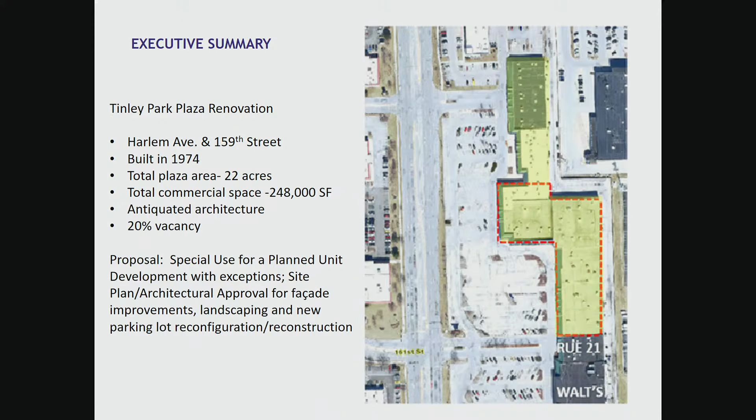As I mentioned, the plaza, let's move the slide to existing site and phasing. There are 3 phases to the project. The first we've already been involved in with phase 1, that was the outlot. That was approved back in 2015. Very nice development, and included revisions to that north parking lot north of the development.

Phase 2 is the one that we're contemplating now, and that comprises a little more than 100,000 square feet, and the demolition of 87,000 square feet, with reconstruction of 67,000 square feet that will include a new soft goods retailer and grocery store. If we could advance the slide. Oh, I'm sorry, never mind. Don't, not yet.

And for those of you that are pretty familiar with the plaza, it handles the very northern tip of the plaza on down to right where Rue 21 was, just north of Walt's. Phase 3 will be everything from that point south, and that is scheduled to begin subsequently to the occupancy of phase 1. So looking to begin construction in the fall of 2020 and occupancy in 2021.

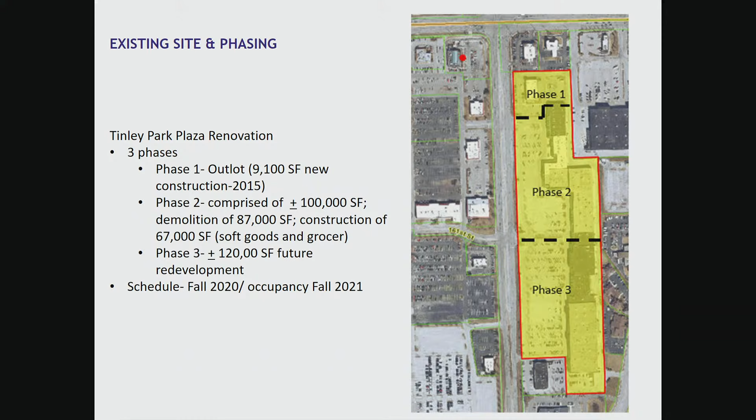Next slide please, on zoning. The property is currently zoned B2. What's a little interesting after we did some research is that the maps since 1977 have indicated this property as a planned unit development, although we could not find any evidence of that PUD ever being adopted. Unfortunately, we found a couple other shopping centers in the community that were erroneously designated as a PUD on the maps. And because there's more than one structure on these parcels, that pushes us into a PUD.

So one of the proposals, as part of the application, we're going to be looking at a designation of a special use for a PUD. But unlike a new construction where we're going to get into much more of the development and site planning, that's going to be restricted on this parcel because we're really looking just at a renovation of an existing site. As the map indicates, the property in the immediate area north and to the east is B2. Across Harlem Avenue to the west, we have the B3, Community or General Business and Commercial District. South of that is Park Place, that's also a B3. Directly south of this center is the B4, and there's a medical facility there.

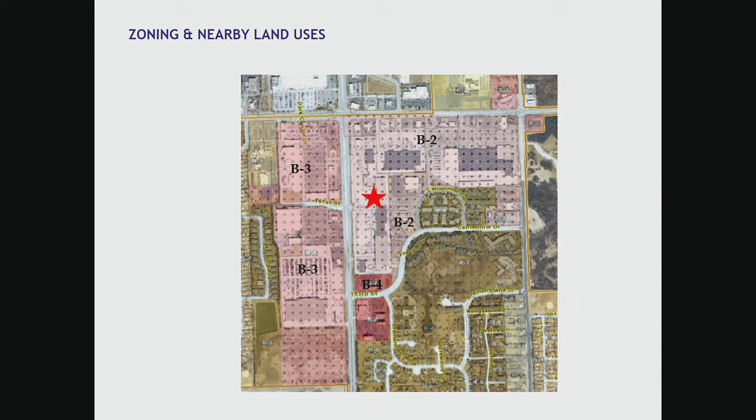Let's move on to the site plan. This exhibit helps to clarify the portion of the building that's going to be demolished. Hopefully that's up in front of you right now. It's not caught up on mine. And as the aerial shows, where you see the red arrow, everything from there up to Rue 21 is what's being demolished.

That area is where some of you remember the Women's Workout World and TJ Maxx were. So that area is being demolished, and the new construction, when you look at the plan below that, you'll see that the facade, or the west facade, is moved back. This provides for a larger parking field and much more straight line access to the center. Before, it was kind of circuitous going around that bump out to the south. So I think this makes for a much cleaner access way to the development.

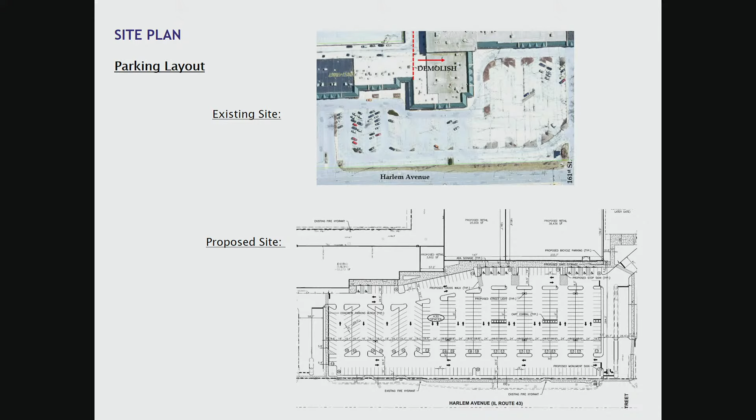Let's go to the next slide please. This is something that was just sent to me just prior to the meeting. It wasn't in your packet, but the developer put this together, and I think it's kind of interesting. You can see the existing aerial underneath, and then the yellow highlighted area is the new construction. Hopefully that makes it a little clearer. I think it was a little difficult at first to understand what area is being demolished and what the reconstruction is.

What really changes the most on this project in terms of site planning is the parking field between the two access ways off of Harlem Avenue. Right now, it's all diagonal one-way parking. What they have done is taken the four north aisles and kept those as diagonal, but the main parking field.

In front of the soft goods stores and the grocer will be traditional perpendicular parking. What I also really like about the change in this design is it brought some parking right up to the building, perpendicular to the building, kind of the traditional downtown type of layout, or as mentioned in the report, some of the newer lifestyle centers like Bolingbrook Promenade, where you bring the parking right up to the front door of the retailer. This really provides for a little bit more intimate, pedestrian scale.

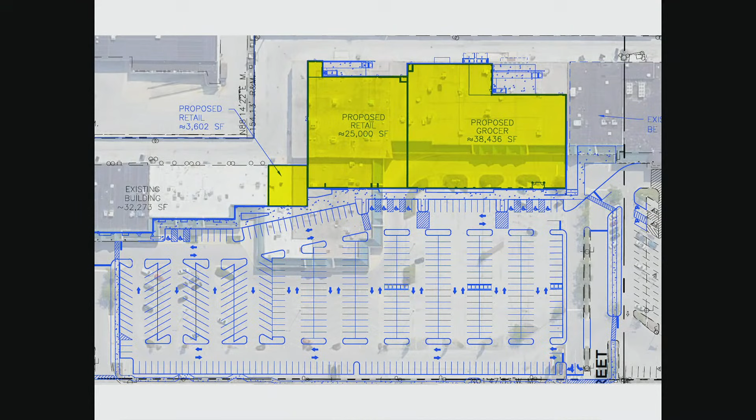One of the issues related to the site plan that we need to discuss this evening—let's go to the next slide, please. What I want to show you there is just where the crosswalks are. You'll see the arrows I just discussed with the perpendicular parking, and then the circled areas are the crosswalks for safe crossing of that main aisle across the front of the buildings.

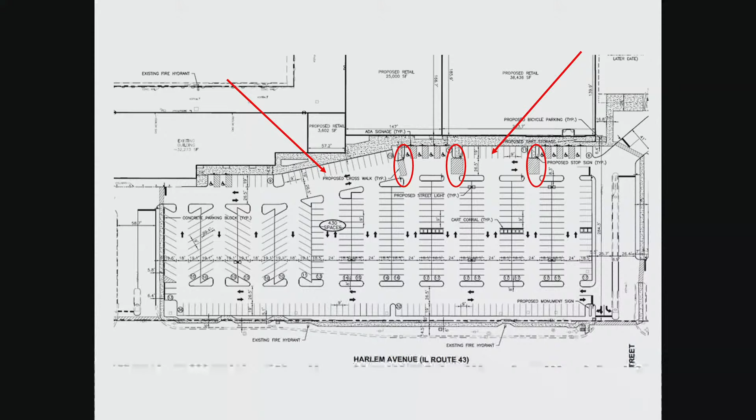Let's go to the next slide, please. What this slide is illustrating is that the main aisles actually exceed our minimum aisle width at 26.5 feet. Our aisle requirement is 26. The rest of the aisles are at 24, or in the case of the diagonal, they're at 18. This is our code, and I know we've discussed this several times on some other projects. I have to say that Tinley Park's aisle width is probably on the higher side than most communities.

It certainly makes for nice, convenient perpendicular parking. But as we see vehicles somewhat downsized and get a little bit smaller, I think we can certainly live with the 24-foot wide aisles. We have them just across the street at Sam's Club. We recently approved them at the Marriott hotels. And actually, the 2015 approval of the Brixmor outlot had some 24-foot wide aisles.

So this is the first item on the open item list where we need to recognize the exception to village code. And if that is supported, we'll include that in the special use, the PUD special use.

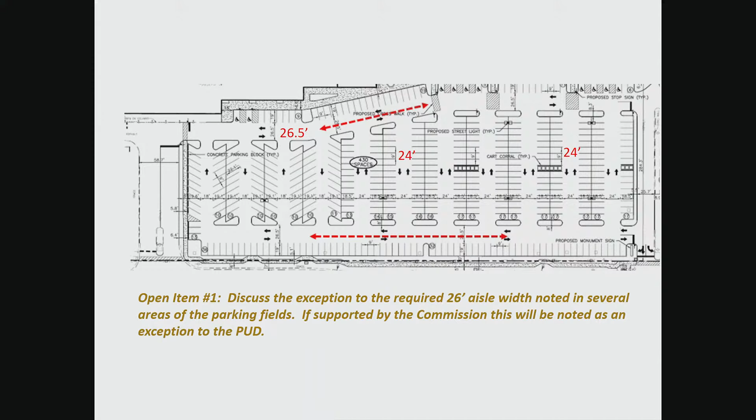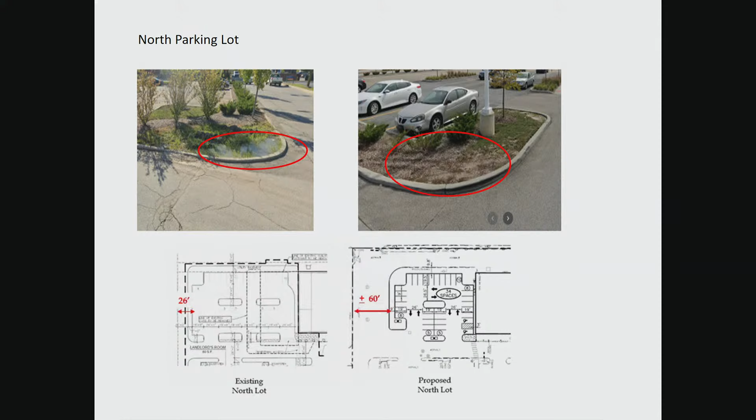But the next slide, please. I've been working with their engineers, and you can see from the red circle that was my biggest concern, where the landscape island on the north side is pushed back to accommodate the wheel drag, but it makes for a very awkward ingress-egress to the parking lot.

So we've been working up to the last minute, and I can see the engineers on Brixmor's side having a smile on their face because some of this stuff has been happening very late at night and early in the morning between them and myself.

But the plan on the right-hand side is something that staff recommended, and I think they've taken it into consideration. I'm not sure this is going to be the final rendition. I spoke to one of the engineers this afternoon, and we talked about some other possibilities because we want to make some more space for some dumpsters. But at the very minimum, we want to make sure that while we're addressing the wheel drag and the need for the delivery vehicles, that we've not made for awkward points of conflict between the parking lot and the access way. So I'm confident by the time we get to a public hearing that we'll have this taken care of. But I do want to keep them as open items so we make sure that that gets done.

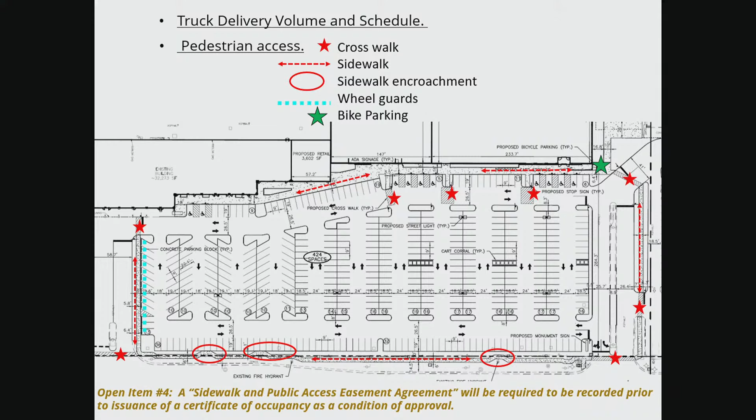So the only outstanding issue here, and they've already agreed to it, I think they actually sent it to me already, is to make sure we get a sidewalk and public access easement agreement. All right, next slide, please.

Trash enclosures, if you did your site review or site visit, you'll notice it's pretty unsightly back there. There is a haphazard array of individual trash dumpsters or toters, and they are not in the required masonry trash enclosure. So they have provided a trash enclosure for the new constructed areas.

And we're still working with them on how to accommodate trash enclosures back there on the existing inline stores. One of the problems is that there is a utility easement that runs right next to the building on the east side of that building. I had a conversation with the engineer just a couple hours ago. They're going to be able to fit 2 to 3 dumpsters in the northwest corner of that north lot we were just talking about, and a couple more at the south end. I'm going to leave it to them to continue to work on that and come back to us with a final proposal on how they're going to handle that.

So it is a requirement of our code and something we put in all our developments, we require it of all of our developments. So we'll leave that for them to remedy.

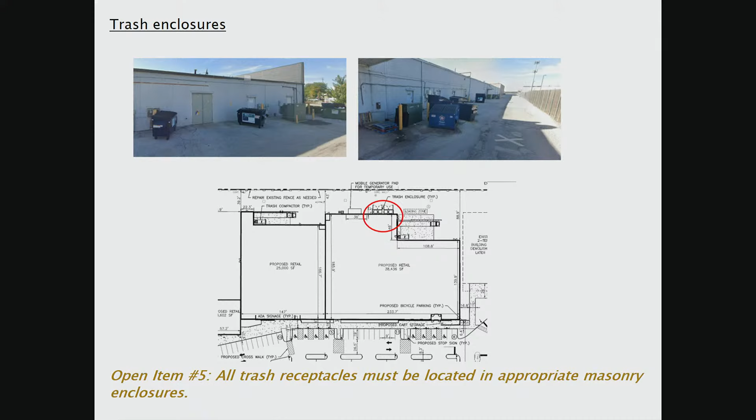Same with the mobile generator. There's a generator in the back. I have not seen anything yet on the screening of that, so I'm leaving that as an open item in terms of the screening of the mobile generator.

Let's see, you can go to the next slide. That just shows you where the mobile generator is going to be located.

And let's go to the next slide after that and talk about the mechanical systems. We've talked about this all the time with all of our developments. It's something we want to be careful to screen from public view.

Right now, for the views from Harlem Avenue, the RTUs are screened. They're not perfectly screened from the east to the west, but that is a pretty long view. If you were over at Centennial, I think that circle over by the bowling alley and Heartland Blood Bank, between those two, there are some views. But we want to do the best we can to screen those RTUs, especially when we're getting such beautiful architecture.

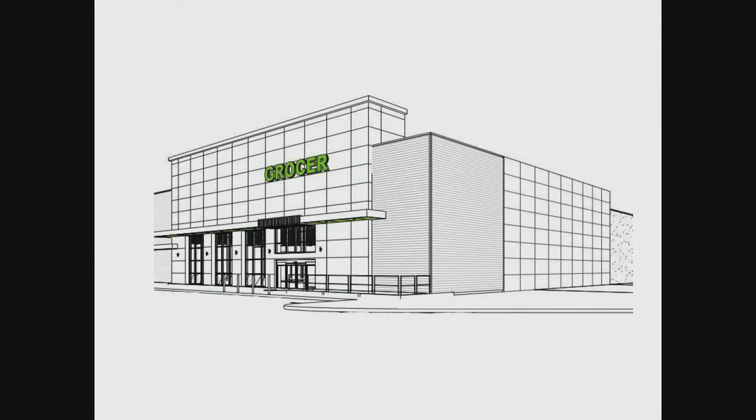Let's run through the next couple of slides, please. These slides are actually a companion piece to that plan with all the red arrows to show you where these perspectives were taken from. Let's get to the slide, Dan or Barb, where I know I've expressed to you the concern about the parapet on top of the grocer. And there's a red arrow on that. But this perspective is taken from southeast of the grocer and shooting northwest.

My concern there is, and we've run across this actually in the outlot development, that you have a parapet which looks great from the front, but it's not a true parapet. It just wraps around the corner. And so the bracing for that is actually visible. You can see in the left-hand side of that drawing, I should put an arrow there, you'll see there's a fairly small, but you can see that - I forget the term there. Mary, you mentioned it to me today. What do they call those, the bracing arms? Oh, I said they reminded me of angle iron.

So my concern is, and maybe not even just from this perspective, but if we were to, could we go back up to the site plan that was a companion to these drawings that show the various perspectives? What my concern is the building that will be constructed to the south will be set back from this grocer. And so anyone sort of entering, exiting that grocery store, if they were to look up to the right, they're going to see this unfinished parapet, and that's my concern.

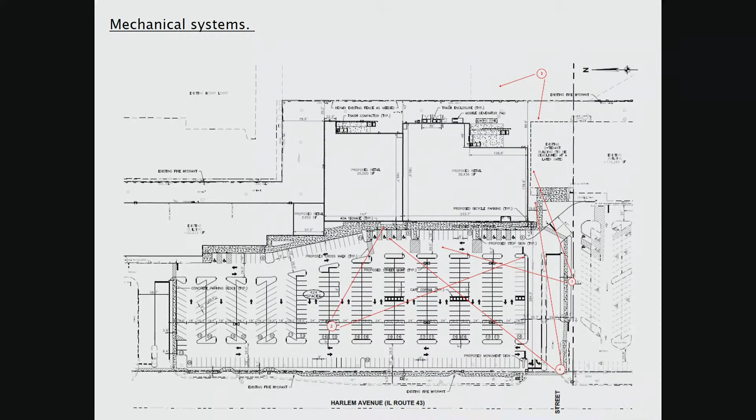Let's go down. Let's advance slides to the pictures, where we have a view looking east and a view looking west. That's after the various perspectives that they provided. And right now, we don't have that issue looking east.

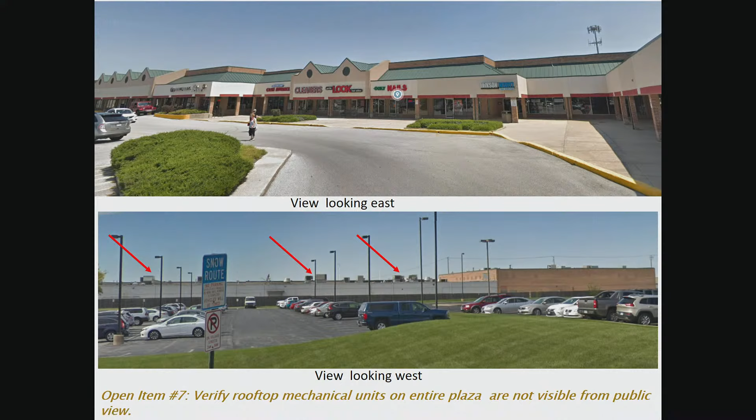And they did confirm that the new facades will meet or exceed this same height, so we don't need to worry about seeing any of the RTUs on the inline stores. During their presentation, I'd like them to confirm that that's true.

The concern, I think, is as we get further south on the junior boxes. You can see on that bottom photograph, that's the one looking west across from the bowling alley, right now they're very evident. So it's hard, I'm hard pressed to ask them to do much better than their current condition. But certainly from Harlem Avenue, I want to make sure they are screened from public view.

All right, so that open item, number 7, was just making sure that the RTUs are screened.

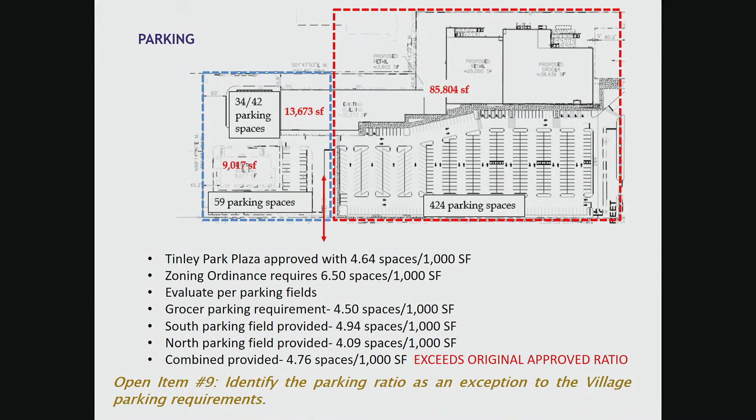So we're very pleased with... let's see, please mute your phone. Thank you. So let's go to the next slide.

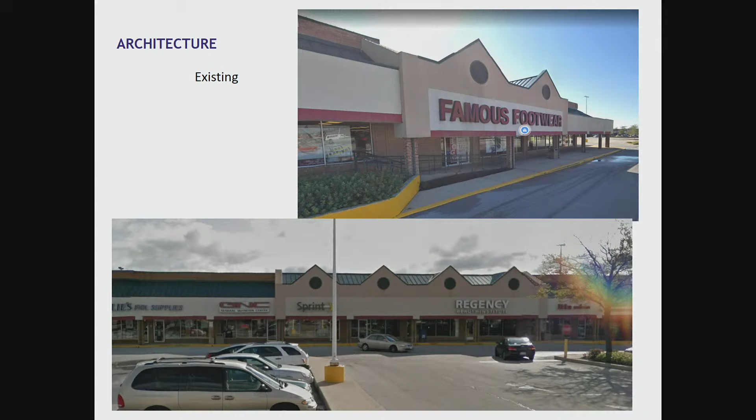The architecture at the top is what is there now, the outlot, and again we were very pleased with that architecture. Probably one of the biggest things we wanted to make sure of as we went to the renovation of the inline stores is that there was some consistency between the two. It doesn't have to be matchy-matchy, but we want it to look cohesive, and the developers want to make sure it's identified as one center, the Tinley Park Plaza.

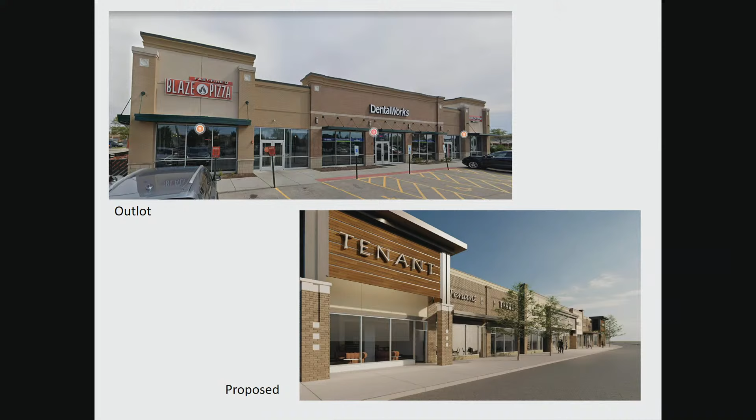So the new inline stores are beautiful, I think, very fresh, modern, natural and kind of earthy colors. And I do think that they are consistent with what we provided with the outlot in form and style, some of the fenestration, the building materials, and even the colors. Let's progress in those slides so everyone can see the nice renderings that Brixmor provided.

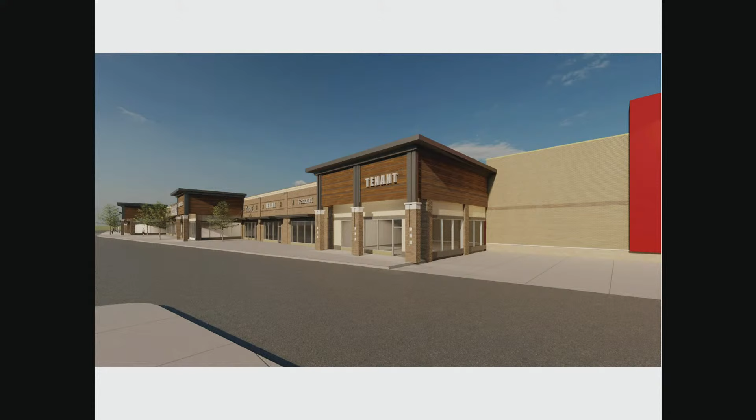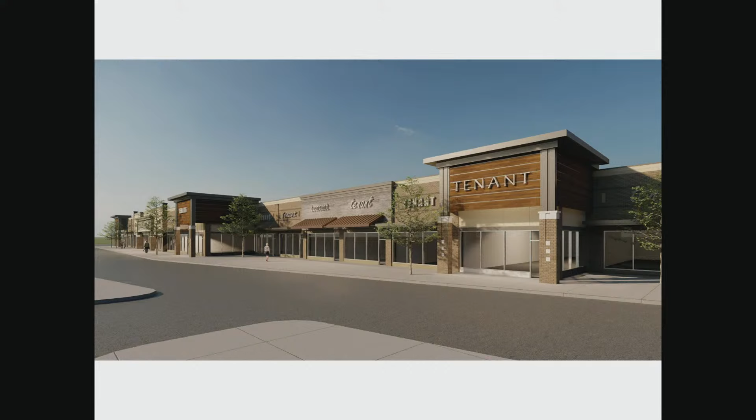So as we progress to those, again, I'm very impressed with the architecture that came out of this. I like the canopies that we had also in the outlot, and the use of materials, modern materials. They introduced me to... there are the panels... Stonewood phenolic. Phenolic, there it is. I hadn't heard of them before, the phenolic panels.

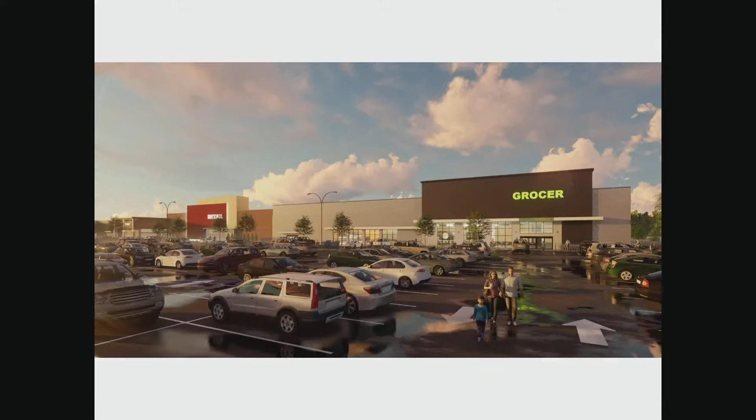Some of these are sort of like the Hardie board that we're used to, cementitious materials. They have Alucobond around the doors that has sort of a metal look to it. They have the wood look to some of those. You can see in the inline tenants some of it is horizontal and some vertical, so they've managed to create nice shadow lines, nice articulation across the front so it's not flat. Some nice details in the brickwork, soldier coursing, and some dentils. I'm very pleased with how this worked out.

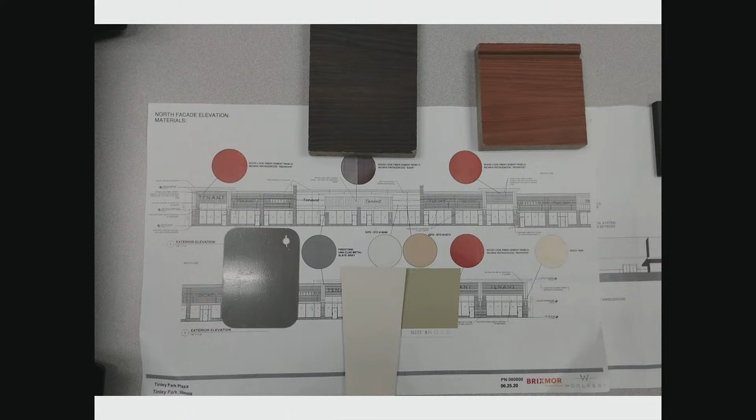Now, the materials in and of themselves are not prohibited. We do have a prohibited list, and they are not on it, but they are occupying more of the facade than what we normally have seen. Honestly, I think the result is beautiful. I don't have a concern about it. We're lucky this is a PUD, so we're not setting a precedent. If the board is supportive of the choices they've made in building materials, we can make that part of the PUD.

Let's move down on this slide. Unfortunately, you know how we usually bring in a building material board for you to touch and feel—we don't have that for you tonight. Dan was the wonderful photographer that put this together for me, but it gives you an idea of the colors and materials for the inline stores.

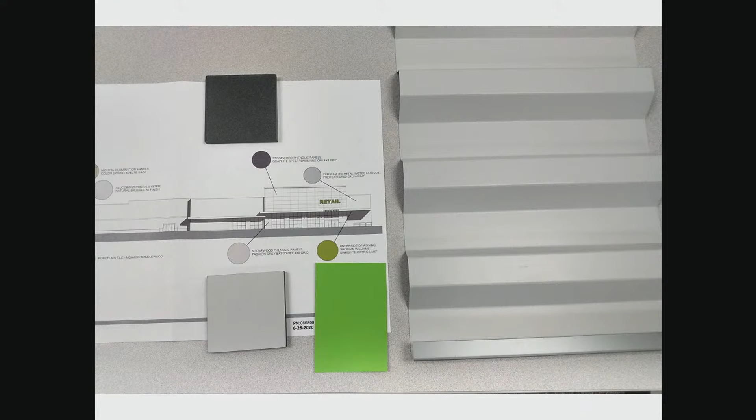Let's progress down in the slides, let's go down a couple. You'll see the metal and the lime green on the grocer. Now, the one thing I haven't seen, and I meant to check with you, Dan, today—have we received anything on the soft goods building materials, Dan? I don't think so.

We received some materials, but I'm not sure it was anything specific. I did think it was more for the grocer. It looked like we received some more for the grocer, but I don't think we received anything for the soft goods.

So when the developers give their presentation, they can talk about that, and then we can certainly make sure that the building materials are here for the commission's review during the public hearing.

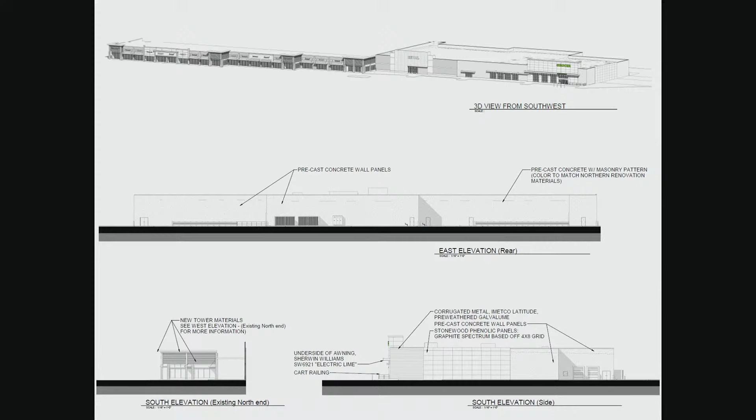So now, Dan, if you're pushing the slides forward, let's go one past the samples for the grocer, the building material for the grocer. This I didn't put in the staff report, and I was remiss in not doing that, because I think it's very cool what they have done here.

I had wanted to make sure that the architecture wraps around the sides, and that north facade of the inline stores is actually very visible - those of us who make their way to Starbucks every morning down this path know that wall is very vacant and plain. What they've stated is they'll have some sort of painted mural, though they don't know exactly what it would be. I did suggest they think about our new brand, Music is in Our DNA, so I'll be excited to see what they come up with. We can put them in touch with our marketing department and maybe do something that helps bring home our brand for the village. I thought that was very cool.

So this open item is just about the building materials, making sure you're all supportive of what they're presenting. If you are, then we will identify that as an exception and include it as part of the PUD.

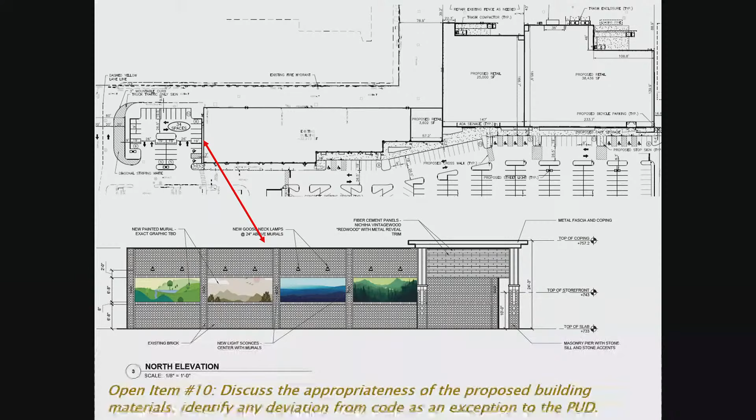Now, when we get into commercial districts like this, I'm less concerned. We're along Harlem Avenue, and we certainly don't want any off-site glare, but with the light standard they're proposing, there won't be. As for the light standards they're proposing, there are some existing ones, and then they have a couple they'll have to add - they certainly don't want to replace all the ones that are out there now.

Our code limited our height at 25 feet, and they are proposing 40. The benefit of that is we'll have fewer light standards if you go taller, and hopefully a more even spread as you look across at night - you don't want to have hot areas and low areas.

It seems evident that the grocer is going to have the brighter parking field outside their store, but there is no excessive deviation of the photometric or foot candle reads across that. So the open item with respect to lighting is just that we need to recognize the height variation as part of that. Let's move on next to landscaping.

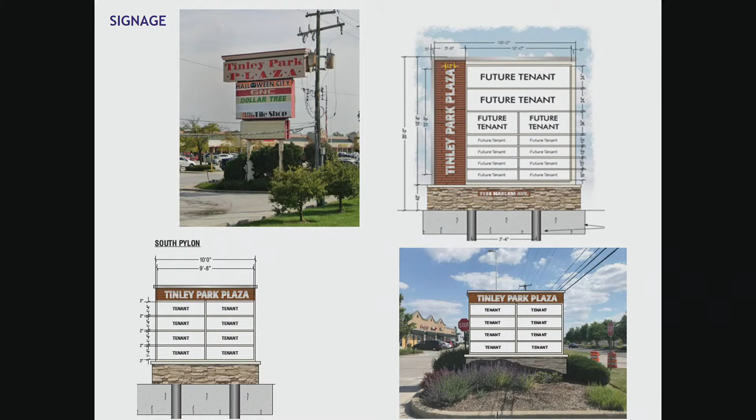Let's go to the next slide. The other issue related to signs is just the setback, and they really don't have a lot of options here. One of the 10-foot high signs is fine and set back 10 feet, but the 20-foot sign and the other sign at the south end do not meet the 10-foot setback, and they really can't.

So we need to recognize that as an exception and put that into the PUD. All right, engineering and fire, we were able to resolve all their issues. On the last slide, we can summarize quickly what the outstanding issues are, and then we'll go on to a presentation from the developer.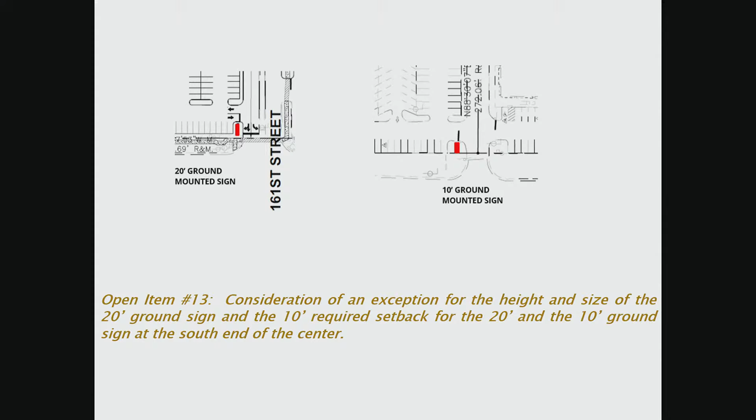As we said in the beginning, we just need to recognize that they are not meeting the 26-foot aisle width throughout the parking field. I'm fine with this, and we've done this before.

The second item is I still want to work with the developer to make sure we have the best layout for that north parking lot, that we have the delivery route figured out, and that we're not getting any wheel drag on any landscape area. So that takes care of 2 and 3. The fourth one we've already handled—they have submitted a public access easement agreement.

The fifth is still open and something we need to work on. I understand they have some concern about the utility easement back there, but we really need to get those dumpsters into approved trash enclosures in some way. Screening of the generator—I need to hear from them what they're going to do about that.

Number 7 is still a concern of mine. I want to be confident that all rooftop mechanical units are not visible. They'll probably be ready to discuss that when they make their presentation.

No problem with number 8, no problem with number 9. If you all are okay there, I think the parking ratio that they're providing will meet their needs without over-parking the site. Number 10 is the actual building materials they're providing for the center. We have an architect on our commission, so I'm anxious to hear from Eduardo on how he feels about the quality of these building materials.

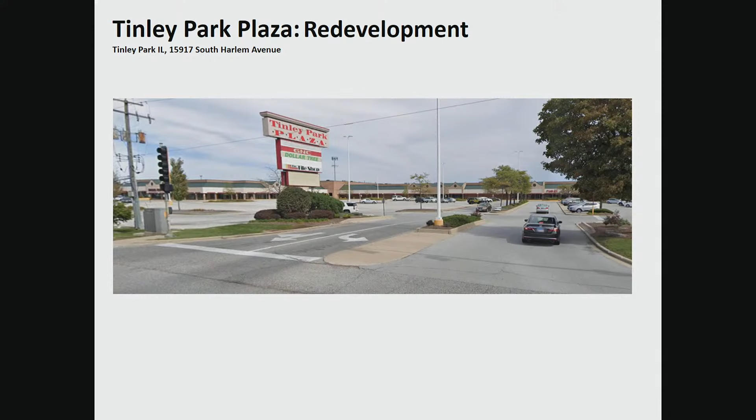So Paula did a great job detailing the project, so I'm just going to add a little bit of color to the details, and then we'll open it up for questions. I will also try to address some of the things she wanted us to hit in her presentation. If I miss anything, please ask questions.

As Paula indicated, the first phase was really just the first opportunity to try to make some improvements here, where we demoed some of that inline retail and built the out parcel.

But now we're really undertaking the major step in transforming the center into a Class A destination, which we believe is going to attract new tenants from outside of the market and bring us more opportunities here at the center.

So the section highlighted here is the area being demoed, just to define that 80,000 square feet. It's the area that, for lack of a better term, snouts out where the famous footwear is, and then goes right there to the northern wall of Walt's.

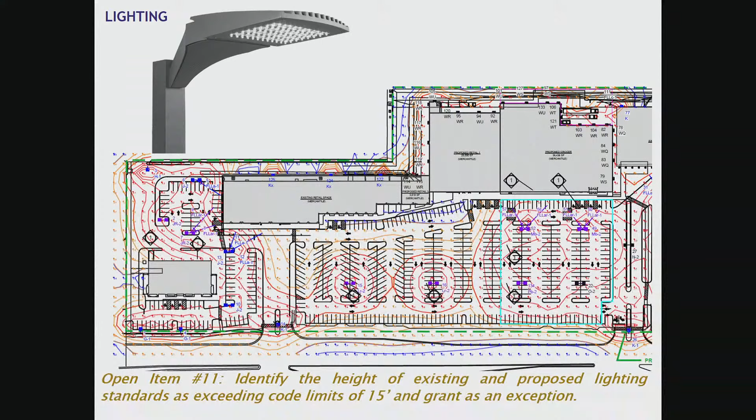And then, lastly, the other thing we looked at was the landscaping. Landscaping can make a significant impact on the impression of the center. We really did not spare any expense on the landscaping.

In this process, working with Paula and staff, anything we looked at, like some of the foundational plantings you might have wanted along the small shop space, our concern was that those spaces combine, get broken up, and the front doors kind of move, so we need some flexibility there. The grocer and the soft goods retailer are there long term, so foundational plantings near those doors aren't going to shift. Thankfully, we were able to get the grocer to sign off on the location of the foundational planting, so it was a win-win.

What I'll do here, to conclude some of my remarks, is address some of the comments that Paula made.

One was regarding the parking and the parking ratio. Early on, the grocer came in with a 4.5 to 1 ratio requirement. We actually got them to relax it, and we're looking at a 4 to 1 ratio—they were just concerned about making sure we could provide 4 to 1 in the overall shopping center. So as it relates to parking, we're still overparked, at least from what this grocer is looking at for the go-forward retail needs.

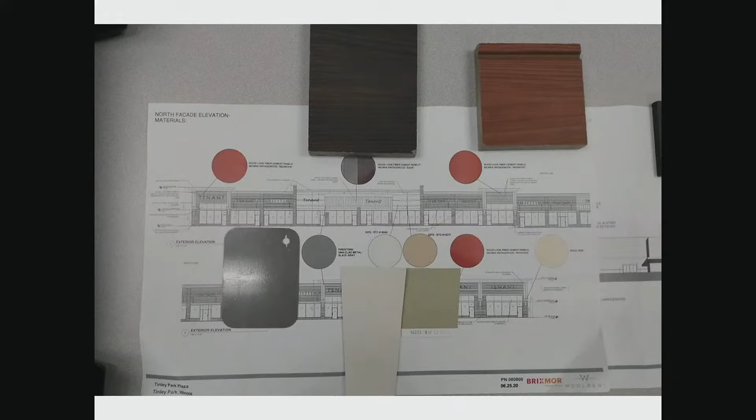I believe there might only be a couple of others that would be floating. The only concern is that if we move those, the tenants there would have to walk a considerable distance to drop their trash. But nonetheless, we want to make the level of investment here to make this a Class A center, whether that's in the front or the rear. We don't want the back of house to be non-representative of what we're doing in the front.

So we will obviously work on trying to have that as clean and presentable as possible. In fact, for the grocer, we actually redesigned the building, bringing the rear wall in 10 feet to accommodate the enclosures and be able to put the trash enclosures there. We unfortunately can't redesign the multi-tenant space to do the same. Any redevelopment in the future, anything that would be phase 3, from the Walt's on over, we would obviously try to make those same accommodations of providing those trash enclosures.

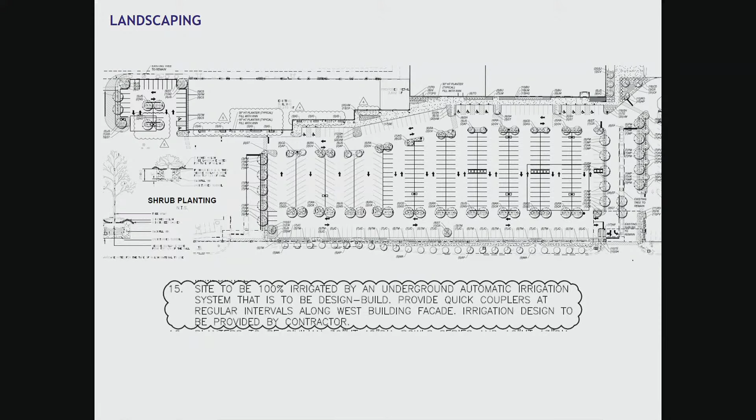With that, I will open it up for questions. And Paula, if I did not address any of the things you wanted me to address, please ask me. I apologize for half of my slides somehow not getting uploaded. That must be my technological issue here, but I went back and looked at what was sent to me, and there are other slides in there. All I did was copy and paste them in the back of mine, but I must have done something wrong. So certainly for the public hearing, we'll get that right. I'll have Dan help me, and I'm sure it'll be done right if Dan does it.

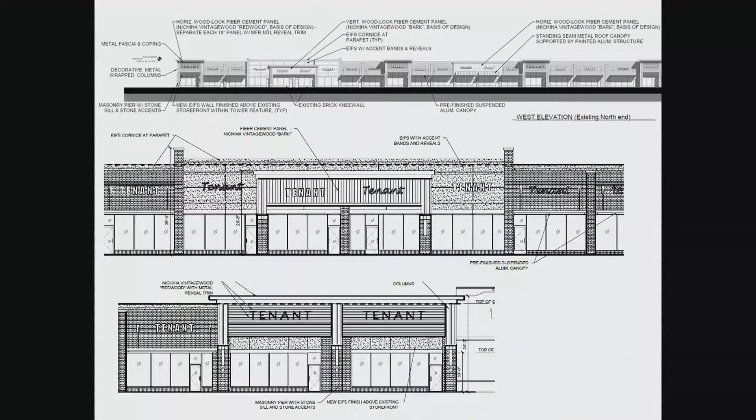Thank you for everything you said there. My only concern, you started to speak about it and I want to make sure I didn't miss anything. I'm still concerned about the parapet, the visibility of the back of those parapets on the junior boxes. Can you address that, please?

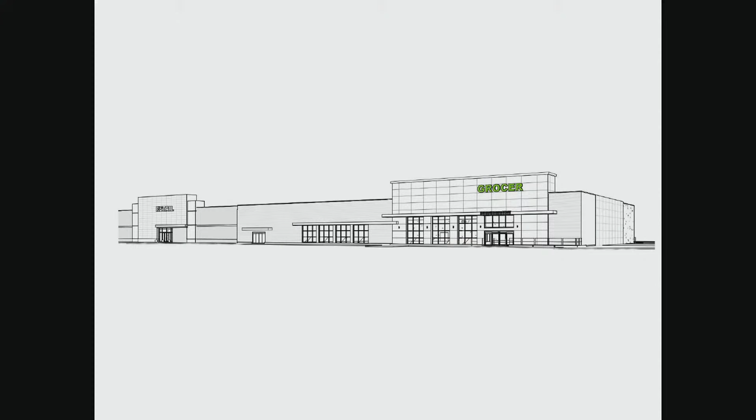Yeah, so I'm going to defer some to Chris Ludwig with Woolpert from an architectural perspective. But one of the things we want to try to do is find something that makes sense. I don't know if it's going to be a different material or a different color, but we're willing to try and find a solution. The one thing that's different from the multi-tenant building or the outlot building, and the ability to not have a quote-unquote parapet, is we're dealing with anchor tenant facades, not just the corner element of a multi-tenant building. When you deal with an anchor tenant facade that large, trying to completely encase it becomes its own structure with its own roof system and drainage. So we'd like to try to find something that appeals to you to soften that, if it's coloring or whatnot. But I think it'd be difficult to redesign the building for another large structure up there. Chris, I can't remember the linear footage, but it's a massive amount of area that we would have to create its own structure for.

All right, well we can work on that. We've got time before the public hearing and we can work that through. Also, do you know the delivery schedule for your vehicles for the grocer? What they've told us is that the schedule will accommodate any local ordinances, but they can't indicate exactly when the trucks will be scheduled. They're trying to ask their operations, but obviously for most grocers, most deliveries are going to be early. If you have any local ordinances they have to abide by, they will abide by any local ordinance.

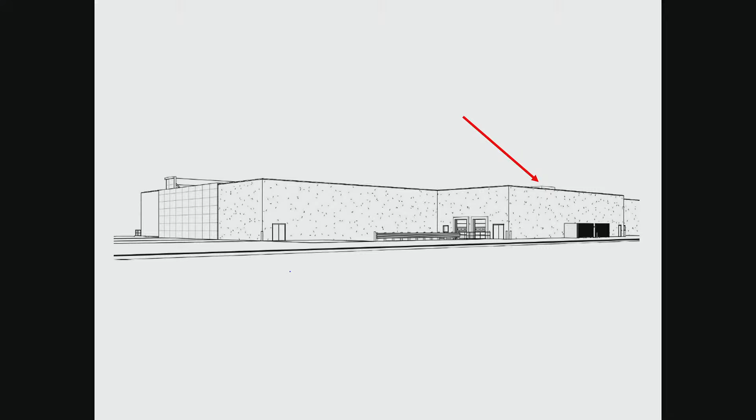This is Commissioner Gatto. I have a couple things. I agree with the dumpsters being enclosed, I'd really like to see that. We don't want anything exposed in the back, especially because it's visible from Hobby Lobby and when you come around the corner there. Also, the sign I'm completely okay with, even though it's a little bit bigger than what we allow. I'm okay with it being the size of that plaza. I think the plan looks amazing compared to what is going on over there right now. I'm very excited to see this development happen. And I also agree with the screening from the HVAC on top, I would like to see it so it's not visible from the street view. That's all I have.

Excellent, Commissioner Gatto. At this time, I'll ask Commissioner Gaskell for any comments. Commissioner Gaskell, are you there? I'm sorry, this is on and off with the mute.

My only problem with the whole plan is the parking. I'm not a big fan of the perpendicular parking in front of the buildings, just because I don't think it's that safe. I think it's just going to create a lot more activity up close to the buildings. And aside from that, it's going to cause a lot of restriction to the fire department if they need to respond to that area, with all those cars parked along the front of the buildings. That's my problem.

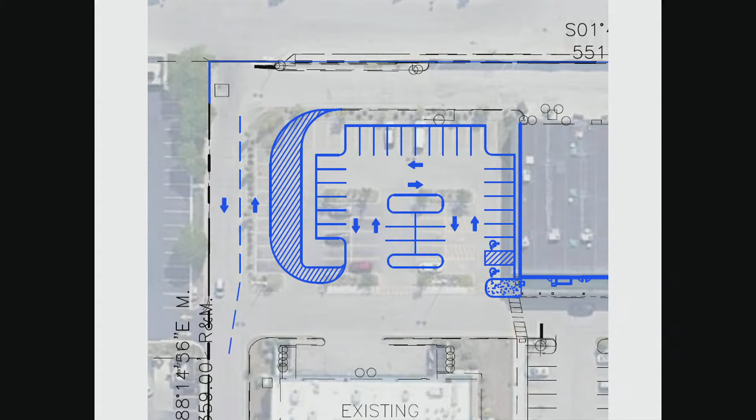That's just some things to consider for that area, because I think it could be a potential safety issue. Yeah, so you can see the east-west lanes, and I'm assuming - I thought it was in one of the other slides - that those vertical slants, not crosshatch, are your striping. And I like that, but you're going to have to make sure that over time, with people driving on it and friction and snow plows and even sun beating on it, it doesn't fade so much that people just take the whole road when given a wider area to drive on. So just be cognizant of that.

Is there anybody on your staff that did any traffic study on that particular area, Andy? So the traffic study was more along the lines of the truck study and the truck routes. We originally had received from the grocer the truck route of coming in off of 159th Street and then coming and traversing the rear. There was concern about the inability for those trucks to be able to turn without coming into oncoming traffic.

They wanted some kind of traffic control measures in order to be able to approve the site. We were even at a point where they weren't going to approve the site. We said that's not our property, we have an inability, at least in a short period of time, to come to a potential agreement. We then learned that Waltz has their current truck route on the route we're discussing here.

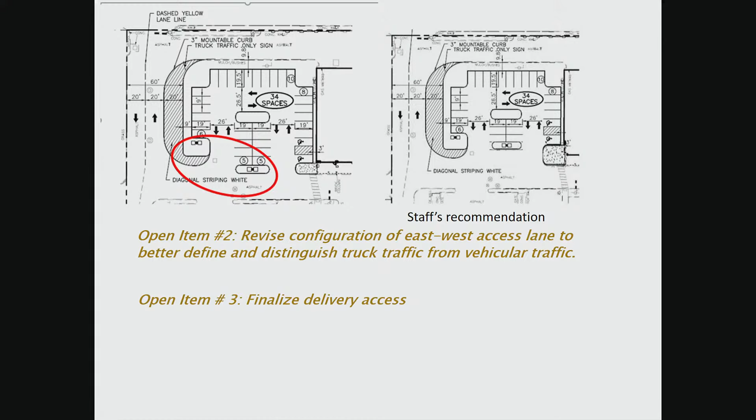With that, those are my comments, and I do appreciate your time, Andy, and your team here today. Staff, is there any further questions that you have at this time that hadn't been brought up by the commissioners? No, I appreciate all the commissioners. It was a lot of work to go through the staff report, and they all gave it a lot of thought and time, so I appreciate that.

I just want you to know we're moving towards a public hearing, and it is scheduled right now for August 6th, but we have laid out a whole schedule with Brixmor, and we have some latitude on that date. Right now the public hearing notice is out for the 6th, and that will most likely be our public hearing night. Okay.